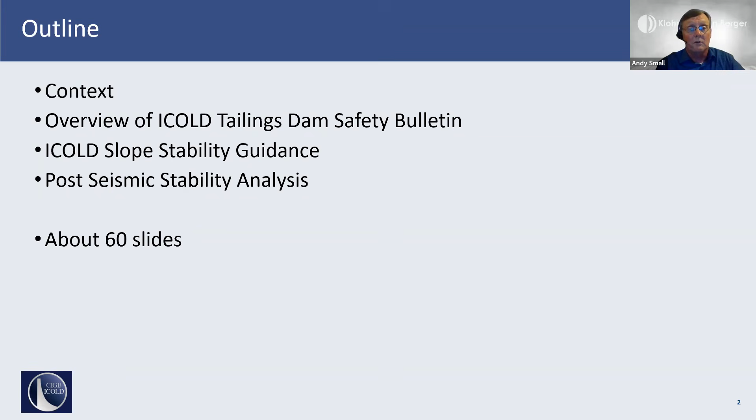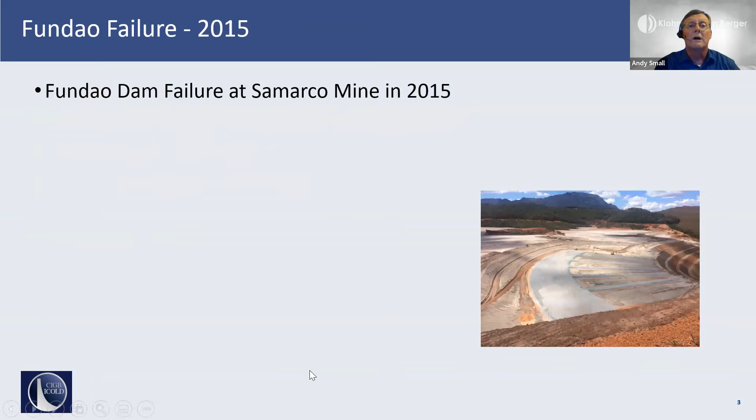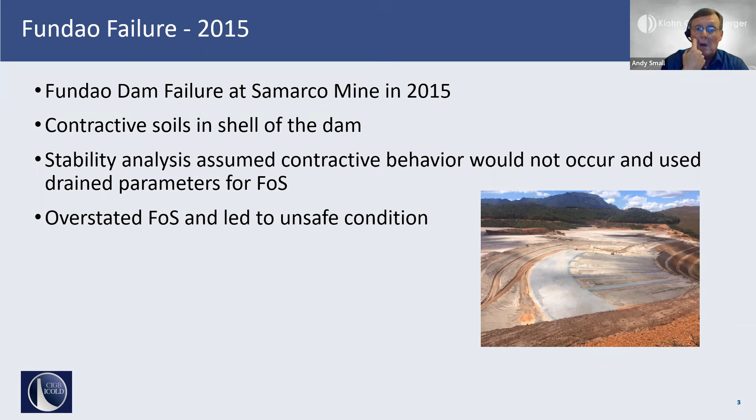So we go back to 2015, and many of you will remember the Fundao failure at the Samarco mine. There were contractive soils in the shell of that dam. The stability analyses that were conducted prior to that, as part of their ongoing stability certificates, had made an assumption that contractive behavior would not occur, and they used drained parameters for factor of safety. And when I asked the consultant of the day why, he said, because that's what the regulation said to do.

So as we're well aware, it overstated the factor of safety and led to an unsafe condition. From the panel report that was prepared, there was a number of cross sections cut. I'm just going to show you some of the stability modeling that was done. This is a typical example at the right abutment, where they used drained parameters. They used cohesion and phi, and it's always interesting to see how tailings can have a cohesion, but that's what they did because they had a bunch of triaxial tests and they drew a straight line to the data and they came up with a cohesion, but that's fine. That's not the challenge we're dealing with here today. And they calculated a factor of safety 1.9.

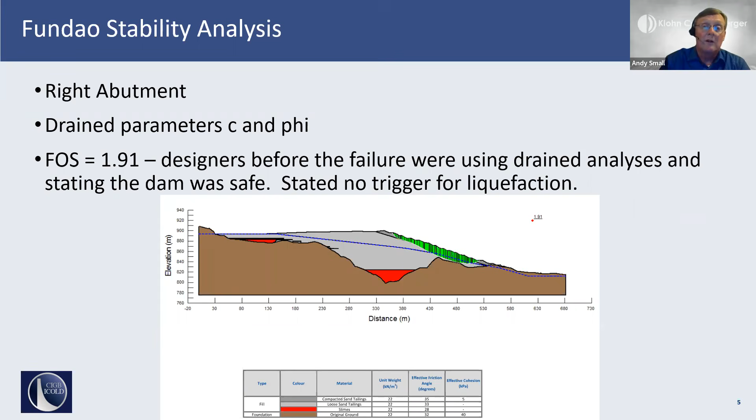They also felt they were in a low seismic area. They knew they had some contractive zones in the dam, but they decided that they didn't need to consider liquefaction because there wasn't a trigger. So they were in a low seismic area, yet they were raising the dam 9 meters a year. Now, if that wasn't a trigger, I don't know what would be. Now, the panel report concluded a very complex chain of events occurred, whereby there was slimes within the shell that led to horizontal deformations, that led to changes of stress state, and that ultimately became the trigger. But had they considered the undrained conditions properly from the beginning and didn't really care about the trigger, they wouldn't have run into this trouble. So the fact there was a trigger almost becomes irrelevant when you had those contractive zones within the dam.

If they had run the analysis back then using even peak undrained shear strengths, they would have found an undrained factor of safety of 1. And that was based on cone penetration test data they had that clearly showed it was contractive.

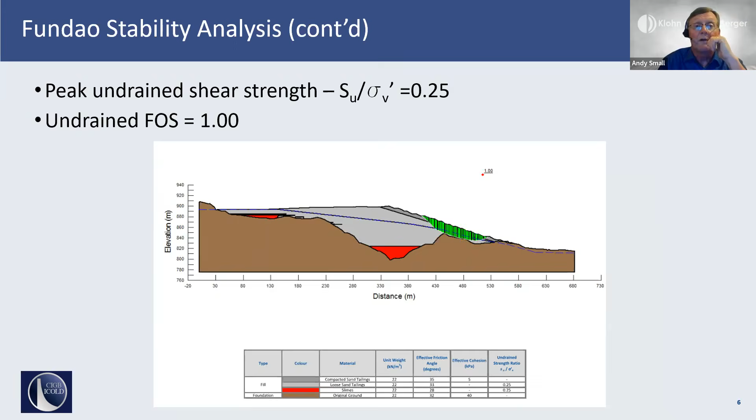The factor of safety of 1 should have been a flag at the time. But Brazil hasn't been used to running post-liquefaction stability analysis. Had they done that, they would have taken the cone penetration test data, interpreted an SU over sigma v prime of 0.07.

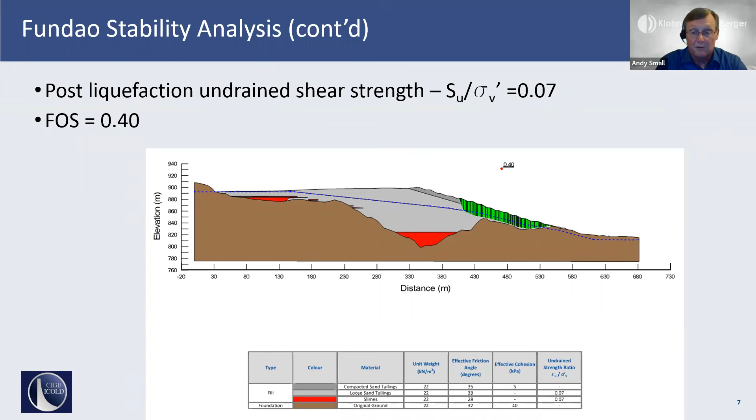and calculated a factor of safety of 0.4. Again, doesn't matter about the trigger. The reality is this is a very large dam. They had the conditions for liquefaction to be triggered. Had they known that this was the type of factor of safety they were dealing with, maybe then they could have done things to arrest the situation by putting in rockfill buttresses or doing something differently, but they just didn't even know.

Brumadinho was similar. The thing that made Brumadinho a little different was the bonding between the tailings particles that created a false strength. And so the owners and the consultant thought they had a very strong tailings and they could build it very high and very steep. But then when the failure started, the bonds broke, and that's what led to the rapidity of that failure happening in under 20 seconds.

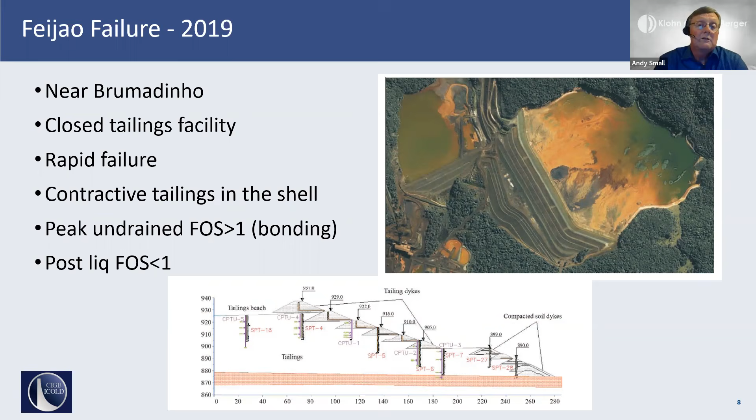But again, they had testing that showed the tailings were contractive. Some of you may have seen that master's thesis that was issued where this figure came from that showed they were contractive, but they didn't understand what they were dealing with. Had they run a post-liquefaction factor of safety, they would have found it less than 1, and they would have been at the stage of understanding they had a potential problem, but they didn't know that. They didn't know that that's what they should be doing.

So we have these two famous failures in Brazil, but the issue is not limited to Brazil. I practice in Canada, and I was seeing over time many other examples of this happening in Canada. In fact, I had one situation in Ontario where the consultant said they had a low classification dam, so therefore the seismic event was a 1-in-475-year event, and they didn't need to run liquefaction. Blow counts were 1s and 2s.

The CPT showed massive dynamic pore pressures and 1 megapascal tip resistances. They had slope angles of 1.5 horizontal to 1 vertical, and they had a head frame immediately downstream, such that if that dam were to fail, it would have flowed into the head frame. So no, this isn't just a Brazilian issue. We're seeing it around the world. I ran into a very important one in India last year.

So in 2016, I created a working group within CDA, and it was just trying to re-educate people about the fundamentals of undrained behavior, building on the work done by Carrier at MIT in the early 1980s, stuff that Scott's been doing. All kinds of people have been talking about this, but for some reason, the message had not been getting out. So I created a working group in 2016 with a view towards updating the CDA guidance and trying to provide improved guidance under CDA.

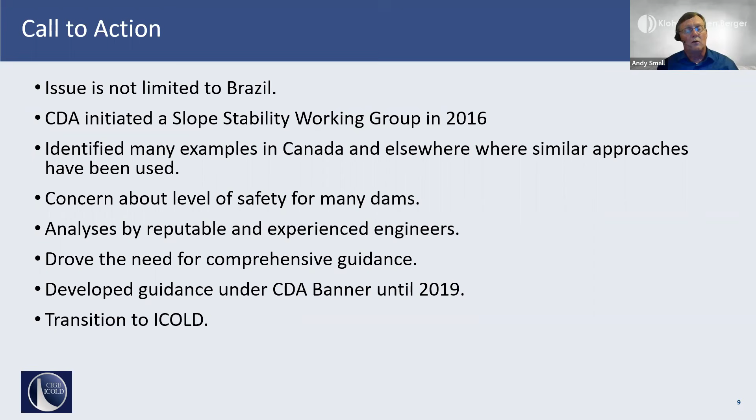And the thing we also did at ICOLD is we tried to provide some framework in terms of the what-ifs, the gray zones. So to help frame the slope stability analysis part of the bulletin, I'm just going to give you a brief overview of the bulletin itself.

Harvey McLeod with Klohn Crippen Berger, who was chair of the ICOLD Tailings Committee for 10 years, did the heavy lifting. He was a primary author on it, supported by a number of us that contributed to the bulletin.

As I said, it started in 2018 when we said we really needed a consistent approach for international tailings dam safety. This came from work that many of us are doing internationally as they were going through audits and reviews after the Fundão failure.

People are trying to understand, do their dams have similar characteristics to Fundão? And you would go to Kazakhstan and they would be following things in Soviet law, and they had a checklist on how to do dam safety, which had nothing to do with the reality we deal with.

And then you go into Africa where they had very, very little regulatory strength and no guidance. So we thought there was a lot of value in having international guidance.

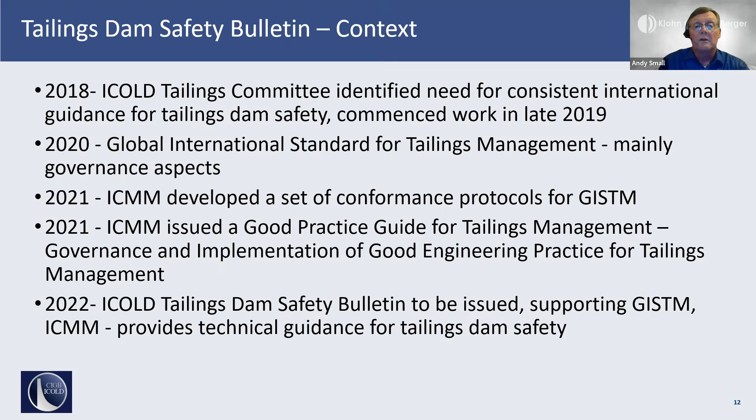That was before the GISTM came out, which was mainly governance aspects, although it does call out that you have to deal with brittle behavior. Then ICMM issued their guidance, their conformance protocols, or good practice guide. So what we did at ICOLD is we believe we've complemented the GISTM and ICMM efforts.

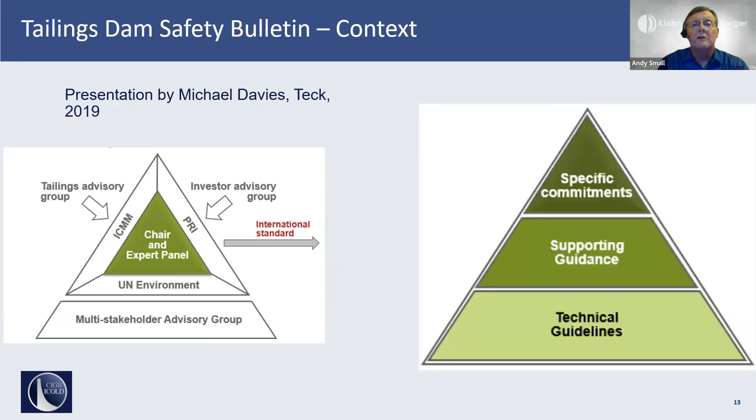In 2019, Mike Davies, as some of you know, had this nice graphic showing on the left-hand side the evolution of the GISTM, and on the right, the GISTM identifying the specific commitments that were being made.

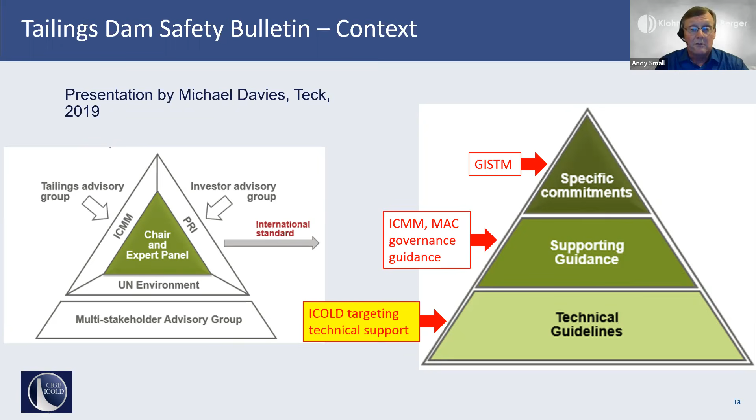Then the supporting guidance is being housed under ICMM and MAC, which is governance guidance. And then ICOLD is providing the technical support. So we've been very careful about not interfering or intruding into ICMM's domain. We're really focusing on the technical issues.

So in that regard, we have a long bulletin, about 180 pages long, supplemented by two appendices, and it covers a lot of things. What you'll see at the start is section 3 is closure. You might think, well, typically you'll see closure at the end of a bulletin like this, but we put it first and foremost to continue to reinforce the importance of designing for closure.

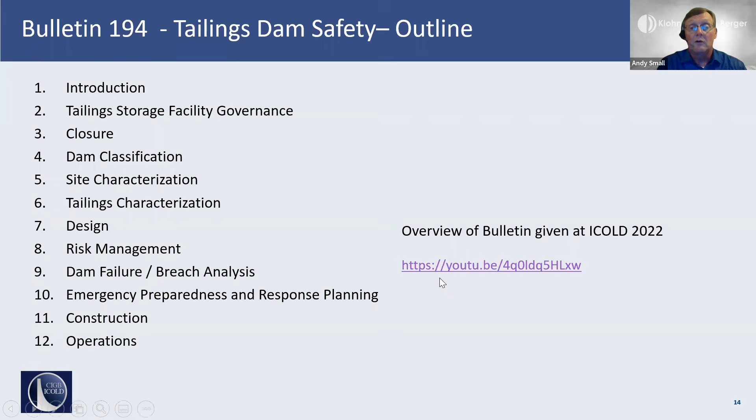If you're interested in an overview of the bulletin, we did one on YouTube. We have a YouTube channel we've created at ICOLD Tailings Committee, and you can go to that channel, and it's about a 3 or 4 hour video that goes through all of those chapters.

And here's really the crux of the matter related to our discussion this evening: appendices A and B, where we thought there was a lot of value in trying to provide information to the practitioner on shear strength deformation behavior of soils and tailings, and then how we take that information and create a framework for dealing with contractive soils in what I will refer to as the gray zone.

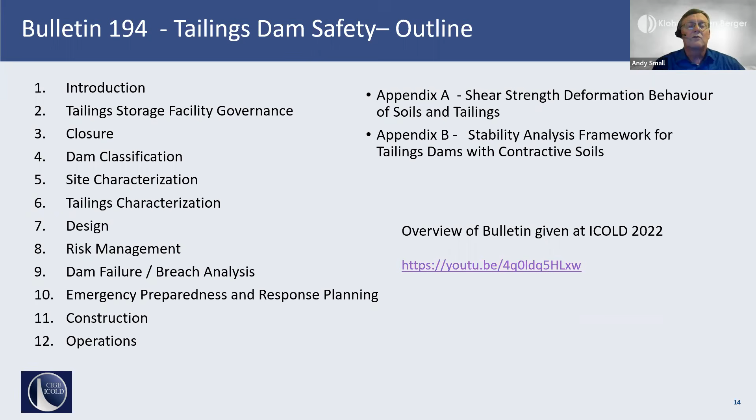So section 7 is on design, and I'm showing you this just to give you an understanding of the elements within the design chapter. You'll see it's rather comprehensive, and the slope stability assessment is section 7.9 of section 7.

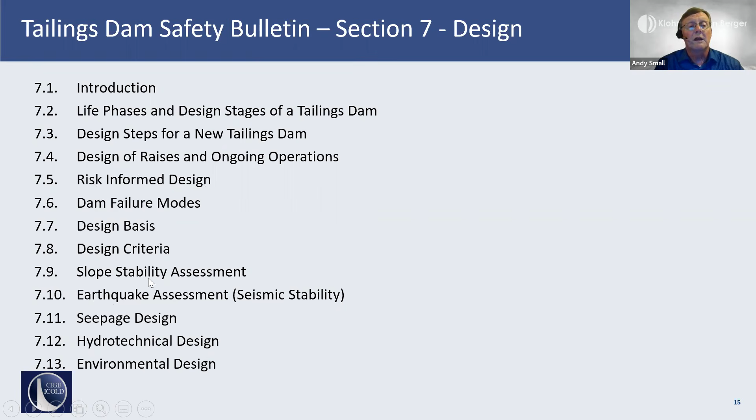And before that, you'll see things such as risk-informed design. Under risk-informed design, we talk about performance-based risk-informed design. We talk about the observational method and how it should and should not be used. And that kind of frames some of the discussion we have later on in slope stability assessment.

So getting into the actual slope stability guidance now. Section 7.9 is entitled slope stability assessment, not slope stability analyses. And that's intentional, because when you're assessing the stability of a slope, a limit equilibrium analysis, which we'll be focusing on today, is one approach for assessing that stability, but it's not the only one, of course.

Nonlinear deformation analyses are also a valuable tool. And if you follow along what Morgenstern was saying about performance-based informed risk designs, that's another piece of the whole stability evaluation.

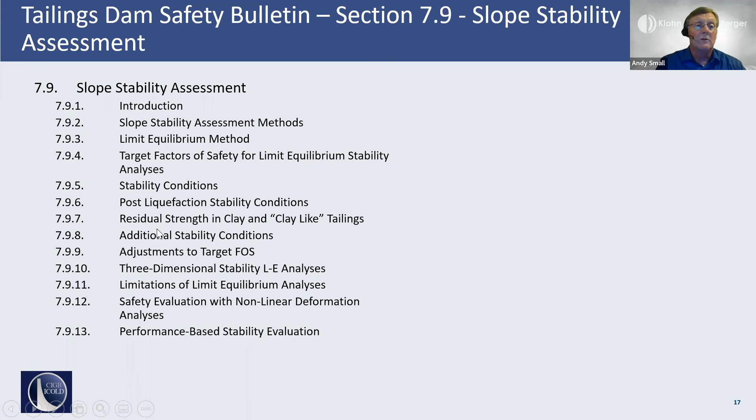So limit equilibrium, which we're going to be focusing on at this session, is really just one piece in your overall stability assessment. Another thing I wish to point out is that some of you may be familiar with the practice in Europe that uses limit states design, and we chose not to embrace that within the bulletin. We really believe that the approach we've described, which is pretty classic in North America, makes a lot of sense internationally.

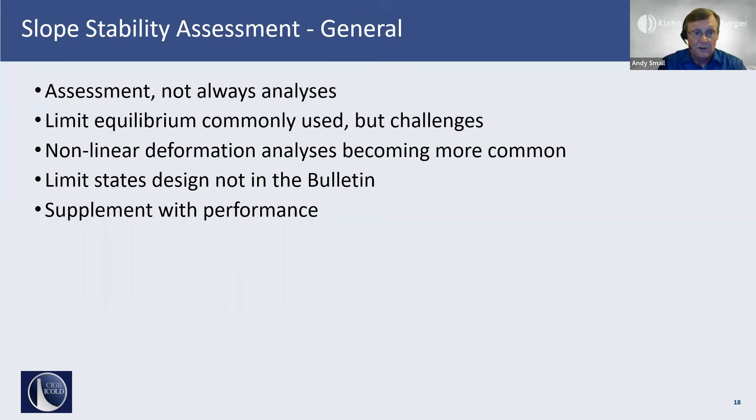So for those of you that are just learning about slope stability assessment, this is a typical cross-section where you have a dam. In this case, there's a starter embankment constructed upstream with this outer shell. There's a zonation and geometry that you identify, material properties are identified, boundary conditions such as the phreatic surface are noted, and design loads such as the height of the dam. All of those are fed into the stability analysis, where slip surfaces are considered and the factor of safety on the slip surface is calculated.

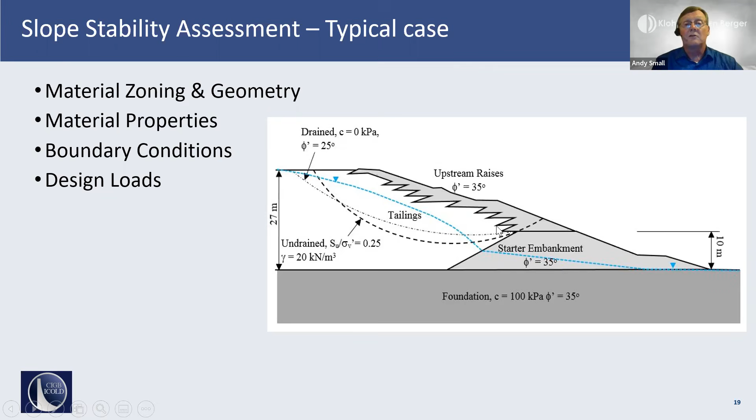When we're looking at a slope stability assessment, we need to consider a number of factors. Consequences of failure are quite important. If you have a very high consequence dam, you may wish to adopt higher targets of factor of safety than what we're going to talk about here in a moment. Again, if it's a very complex dam with a lot of uncertainty and variability, that could have a real influence on how you deal with the slope stability assessment. We're going to spend time talking about contractive-dilative issues, comprehensiveness of site investigations, geotechnical monitoring and instrumentation.

This strain incompatibility issue is very interesting because limit equilibrium does not deal with strain incompatibility. In the observational method, if you have a very robust investigation program with significant instrumentation, and you're using the observational method the way it was intended—that is, you're not just monitoring for the sake of monitoring, you're monitoring with a contingency plan available—then you could actually get away with a lower factor of safety.

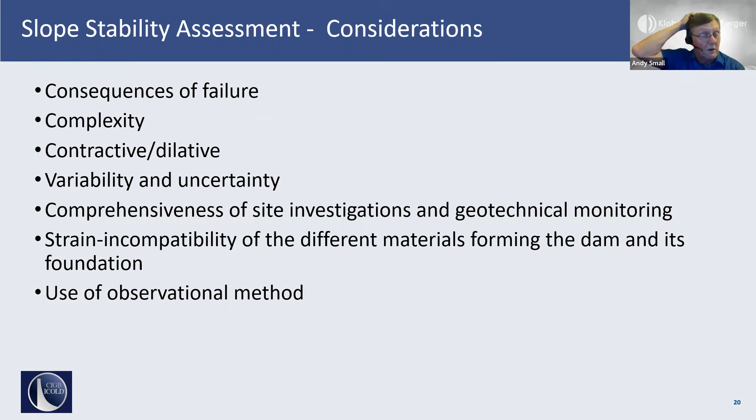What I'm showing you here is Mount Polley, and this is a very interesting example of strain incompatibility. This is a section through the dam that failed in 2014, where a stability model was run, calculating a factor of safety of 1.27. This was done by Klohn Crippen as part of a very detailed report that examined the failure of Mount Polley.

At Mount Polley, what happened is a foundation clay, a glacial lacustrine unit, was thought to be over-consolidated based on early investigations, but became normally consolidated as the dam was raised. So it passed the pre-consolidation stress of the materials and became normally consolidated. Then with continued raising, it went undrained and the whole dam failed. Using peak undrained strengths in the clay and the strengths of these materials, a factor of safety of 1.3 was calculated—this is what was happening when the dam was designed.

The designer of the day said, I have a factor of safety of 1.3, but they were actually calculating it based on over-consolidated strengths at the time, and they were happy because back in 2014, there was an interpretation of the slope stability guidance that said a 1.3 factor of safety was acceptable for end of construction. They said, we're still in construction, so all is happy. What they didn't understand was how the clay could change.

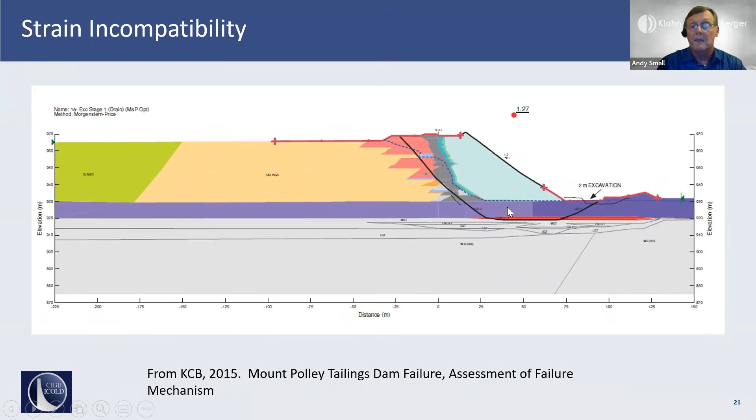So as a result, when you're in a limit equilibrium model and you put in the peak strengths of the materials, you're inherently assuming that the slip surface will move at the same shear strain along its length, and it'll achieve the same peak strength at the same shear strains. Well, limit equilibrium analysis can't represent that. It can't account for the fact that by the time this has failed, this is reaching a peak. It can't do that.

Some of you may have seen Morgenstern's lecture in Hong Kong a few years ago, for the 25th anniversary of the slope stability analyses. He was really criticizing limit equilibrium analyses at that time, and rightfully so, because a lot of them were being done improperly, really advocating for non-linear deformation analysis. He reviewed an early version of the slope stability guidance I was working on for CDA and said, Andy, what you're doing is fine for new dams and fine for many dams as screening tools, but because of this central issue, limit equilibrium is going to be a problem, because at the time they were just wrapping up this thesis.

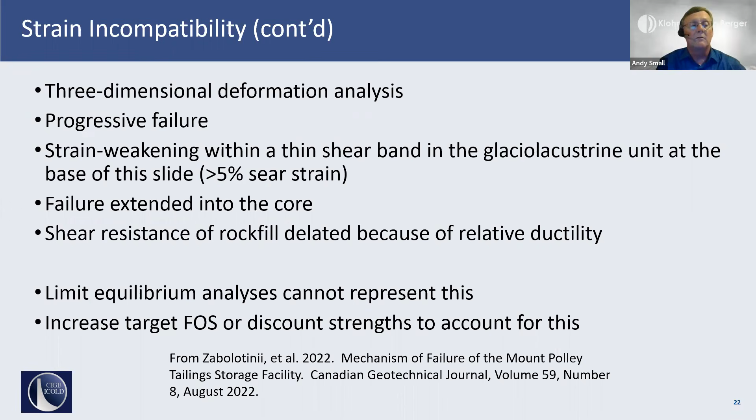So how do you handle that with limit equilibrium? If you have this type of geometry, which is obviously very different in terms of stress-strain parameters, maybe you handle it through increasing the target factor of safety. In my practice, what I do is I discount the strengths. So you still can handle it with limit equilibrium, but you've got to go in with eyes wide open.

Coming to the target factor of safeties, we've only specified two targets in the bulletin: static conditions, minimum target of 1.5, post-liquefaction 1.1. These targets are based on the understanding that you will be following leading international practice for site characterization and parameter selection. So if you're not doing that, if you're drilling 2 boreholes instead of 20, and you're really not following international practice, and you don't understand the foundations properly, then 1.5 doesn't make sense.

The thing about these guidance documents is that people look at the tables and say that's what it is, and they cast it in stone. You will find many words in our document that say, no, don't cast these in stone. Consider them targets and use engineering judgment to establish what is appropriate for your project.

There's also been discussions about what's the factor of safety for closure or for operating, or do I need to do things differently for planned dams. That may be, okay? You may have to make modifications to the targets.

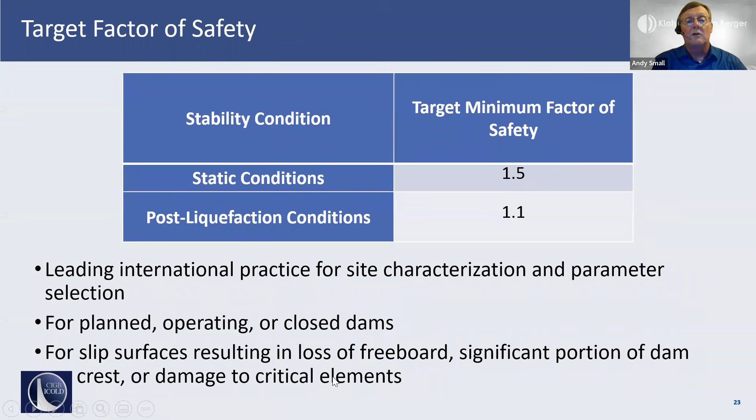And then the other thing is slip surfaces. What about these shallow slip surfaces that often people represent as critical, and that becomes the one they report in their slope stability reports? We're saying no, these targets should apply to slip surfaces that result in loss of freeboard, significant portion of the dam crest, or damage to critical elements. I have an example coming up in a couple of slides.

In many guidance documents, you will see target factors of safety provided for end of construction, rapid drawdown, or seismic and post-seismic loading. We do not provide those. Part of the reason is many people were taking a 1.3 end of construction target and building starter dams that were 20 meters high, putting tailings behind it, and saying I can still handle 1.3 as end of construction because I'm in the middle of construction. Well, if you look at the consequences of failure of that dam, they could be pretty severe.

That whole end of construction target of 1.3 that we saw coming from our hydropower friends was when they're building a dam that's not impounding water. If the dam were to fail, the consequences were a bit of a mess - they had to clean up and rebuild, but it wasn't a catastrophic failure. So we're very clear that if you're at end of construction on a tailings dam, you need to look at the consequences of failure, the performance you've been experiencing, and establish what you think is appropriate.

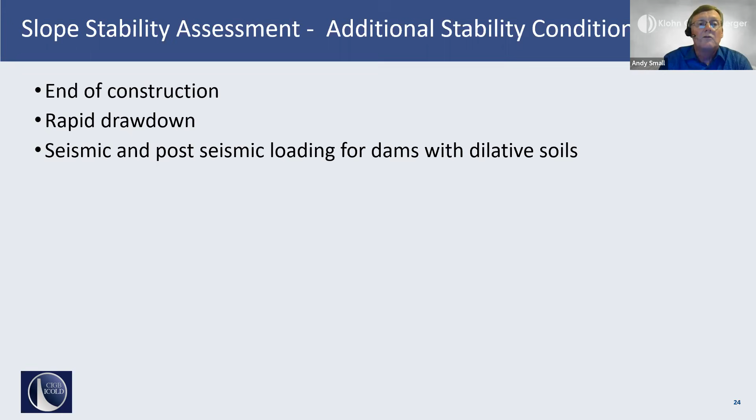Rapid drawdown for tailings dams - many of them have beaches, so that becomes irrelevant. Many tailings facilities don't really have a rapid drawdown mechanism. Some may have decant towers, which can drain the water out quickly, but in today's day many of them don't have that. And when we're dealing with seismic and post-seismic loading for dams with dilative soils, we actually don't prescribe factors of safety for that - we drive the user to deformation modeling.

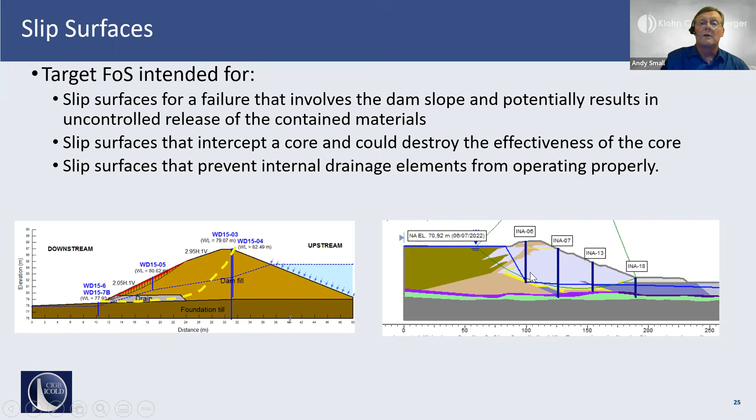So when I was referring earlier to slip surfaces that mean something, this is what I'm trying to show here. This is an example of a slip surface that we would want to see represented in a slope stability analysis that adheres to a target of 1.5. As I said earlier, many reports we see have this type of shallow slip surface being reported as a critical slip surface, and we've got to stop doing that. Over here, we have a slip surface passing through a dam that has a thin core and drainage elements. In this case, that could be a problem if there were deformations or movements along it that could affect those internal elements.

Now, the rate of failure is an important underpinning of this guidance. For saturated soils, we deal with drained and undrained failures. Many of you will understand these terms, but some of you may not, so I'm going to go through this slowly because it's a fundamental part of the guidance.

In drained failure, the rate of failure is slow enough that excess pore pressures generated during shearing dissipate, so the failure occurs in a drained manner. In an undrained failure, the rate of failure is faster than the ability of excess pore pressures to dissipate. Note these terms: rate of failure, not rate of loading.

When you're building a dam on a normally consolidated clay, putting 3 or 5 meters of fill on top of it, that's a rate of loading. You'll get a pore pressure response, undrained, as a result of that, and that's fine. But that's not what we're talking about here. What we're talking about is when the dam decides to fail, whatever the trigger may be, whatever failure is starting to develop - is the rate of failure going to be drained or undrained, not the rate of loading.

You can actually load some materials like a silt in a manner on a construction project - and what I'm dealing with right now, we have all kinds of piezometers in the silt layer, but the rate of loading has not been high enough to trigger undrained loading in that silt. But with blow counts of 5s and 6s, we're worried that when it starts to fail, it could be an undrained rate of failure.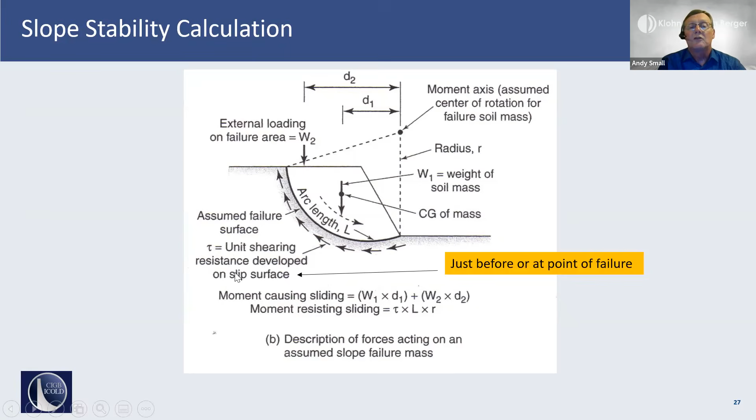So when we're looking at the factor of safety calculation, which is really a calculation of the maximum shear strength that can be generated from the soil strength divided by the shear strength required for equilibrium, then we're talking about this maximum soil strength just at or before the point of failure.

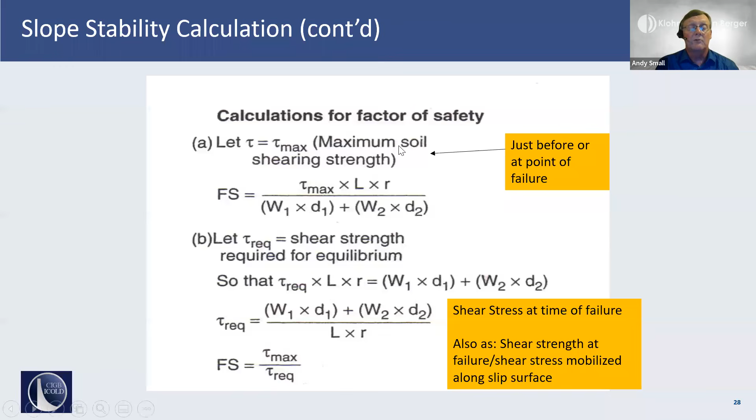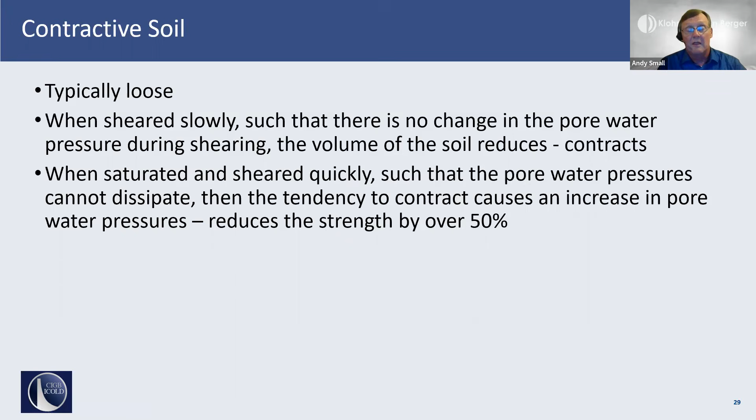And that's where this undrained bit comes in on contractive soils. So again, to reinforce the point, contractive soils, when saturated and sheared quickly such that the pore water pressures cannot dissipate, the tendency to contract causes an increase in pore water pressures, reducing the strength by over 50%. I have this little graphic to illustrate it further because as often as I use these words and take them for granted, I find this image tends to help.

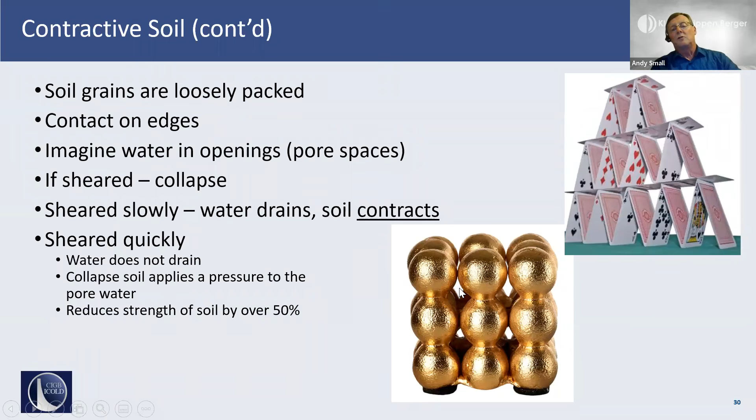Picture the soil grains at edge-to-edge contact, waiting to collapse. If you sheared it slowly, the little balls here would fall into the cavities between them, or the house of cards would collapse. If I was doing it slowly, with water in the pores, the water would drain out among the balls. If I sheared it quickly, as the balls tried to compress, the water would take the load, and that's what drives the strength down.

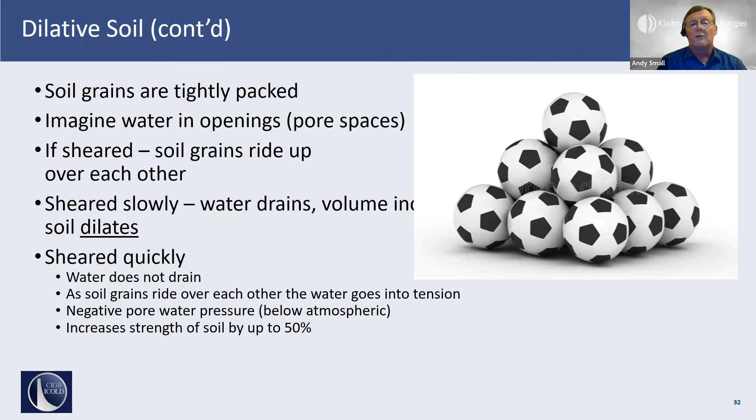If I look at a dilative soil, picture this stack of soccer balls - same idea. When the shearing happens on the soccer balls, what's going to happen? The balls are going to ride up over top of each other. There's a tendency to dilate if done slowly in a drained manner. If done in an undrained manner, as those balls try to pull apart to slide over one another, they will actually take the water into tension, which drives the pore pressures down below atmospheric and increases the strength.

So again, the rate of failure governs the analyses. In the stability reports I write, I actually talk about that. I say, okay, I have a clay in the foundation. It's going to fail in an undrained manner. It's a contractive clay, and therefore using undrained parameters, because the dam is failing in an undrained manner. I have sands and gravels compacted above it. They may also fail in an undrained manner, but they may generate negative pore pressures. As a conservatism, I'm not going to count on that. I'm going to continue to assume that they're not generating pore pressures during shearing.

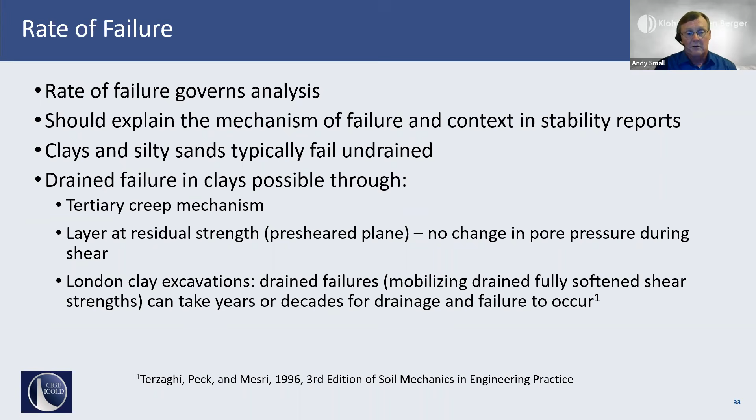So when we talk about failures, I might comment on who's ever seen a slow failure. Well, you could have a drained failure through some sort of tertiary creep mechanism. If you have a pre-sheared clay layer in a foundation, yes, that could happen in a drained manner, because by definition, residual strength is no change in volume, no change in pore pressure during shearing—that could be drained. Terzaghi pointed out that London clay excavations have actually experienced those slow failures in a drained manner for many years. So they do exist, but I believe they're an exception, and we really have to pay attention to the undrained failures.

So when we're looking at the slope stability assessment and undrained contractive things, we need to look at triggers—seismicity or static loading. We are asking you to consider the peak undrained strength when you get to a factor of safety of 1.5 and limit equilibrium. When dealing with clays that have not been pre-sheared, that have not gotten past their peaks, do you need to look at a large strain strength condition as well?

That actually relates to the post-liquefaction of tailings. It's a little similar. When we're talking about post-liquefaction of tailings or a granular material, we will target a factor of safety of 1.1 for that. We assume there's a significant strength loss beyond the peak undrained strength, but the same can happen in clays, and clays can lose a lot of strength. Now, the thing about a clay is it can take a lot more strain to lose that strength, and that's why we typically don't look at it. But if you're dealing with a clay that can lose significant strength over 5 or 10% shear strain, then you should be looking at the residual strength.

That is Mount Polley. That's what happened at Mount Polley. If they had done the stability analysis understanding how that clay could have gone past the peak, gone to a residual condition or a post-peak large strain condition, prior to the rock fill and the materials above it experiencing their peaks, then they would have been fine. So there are some cases where we do run a large strain post-peak strength against a 1.1. That's not necessarily tailings and liquefaction.

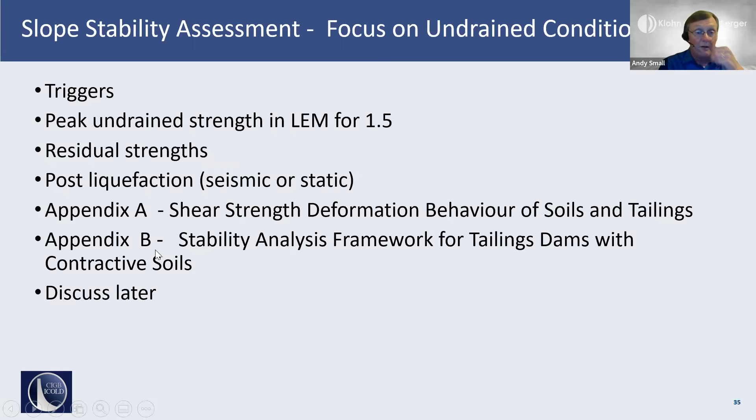So these appendices A and B provide a lot of details on the undrained behavior. I'm going to skip along here.

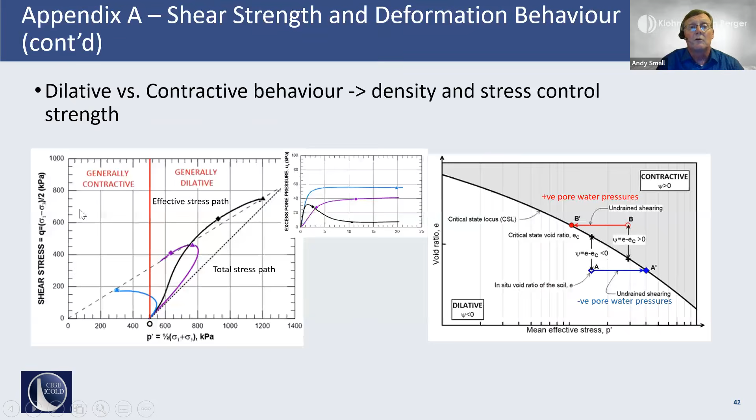In Appendix A, there's a number of fundamental concepts elaborated. I've touched on a bunch of these already, so I'm not going to spend time going through these slides with you. I'm going to get to this one here that's pretty important.

So Appendix B presents a logical framework for selection of analysis techniques and selection of appropriate factors of safety when you can't meet the minimum targets we've outlined. For existing facilities, it may be necessary to accommodate existing contractive and/or brittle materials and structural zones - that's like toe berms and so on, or dewatering, although I think toe berms make a lot of sense.

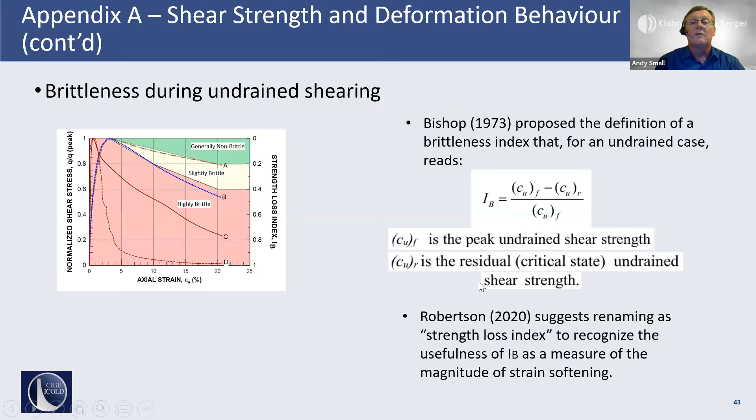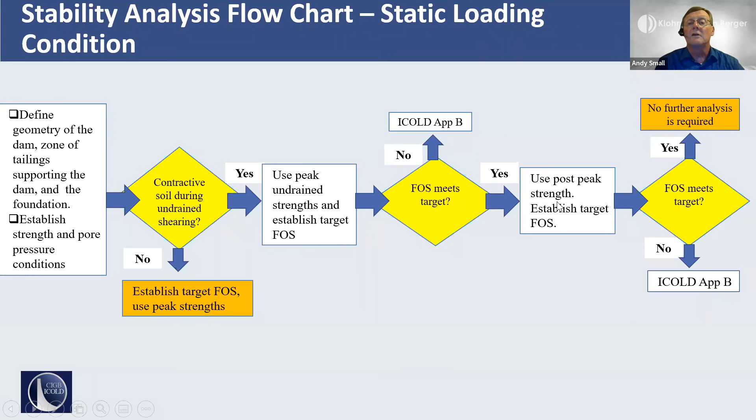It emphasizes the importance of the factor of safety calculated using post-liquefied shear strength over the static factor of safety. So if I go back here, the reality is what many of us do in the industry is we start over here. If we have a potentially liquefiable zone in the dam, we start here and work backwards. We don't start over here, we start here. Because if we can meet the target 1.1 factor of safety post-liquefaction here, then we're fine. But if we can't, then we have a bunch of work we have to do to try to sort it out.

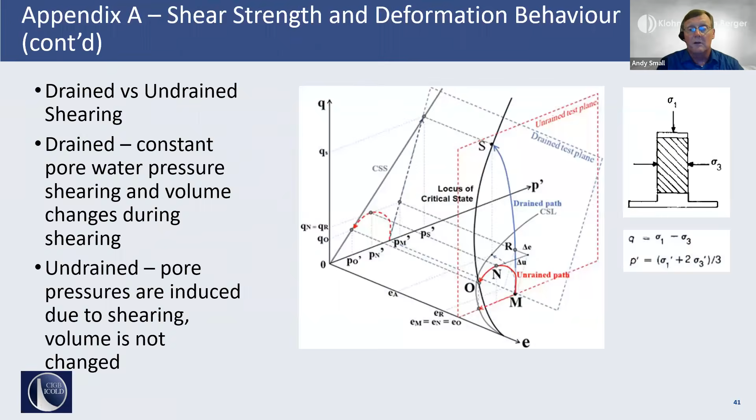So within Appendix B, we provide a framework that has different cases depending on the brittleness of the soils. I'm not going to get into that with you - the bulletin will be issued in October, and I encourage you to go look at it and understand the conditions and the different targets and factors of safety we suggest.

But it really boils down to how cases 1 and 2, that are not considered brittle, can support reducing the factor of safety using peak strengths to 1.3 rather than 1.5. The factor of safety should still be greater than 1.1, but the strength loss isn't that significant.

In my practice, I have situations where I'm not getting 1.1 here, I'm not brittle, so we're doing other things to try to develop a safety case that shows it, and it comes into triggering, it comes into what the true deformations may be, running a FLAC analysis to try to understand what truly could happen. Would the dam truly run away from you?

So just because you don't meet the targets doesn't mean you have to say the sky is falling. There's more work that can be done to build a safety case. But if you have brittle tailings like this, and particularly if there's life safety issues at stake, at 1.1, don't worry about the triggering - assume it triggers and just do it.

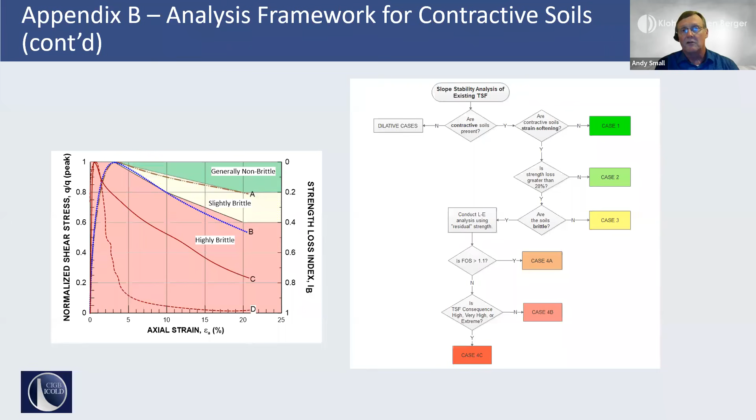The triggering analysis is done to inform the potential probability of the event occurring, which may inform your prioritization and timing for implementation of remedial measures, but it doesn't change the fact that you can't play a triggering game to defer or cancel the work.

So in part 4 here, this is the last part, seismic stability analysis. I really want us to be using the term post-seismic stability in a certain way. Post-seismic stability is often used interchangeably with post-liquefaction, and I really wish we would do it differently.

I wish we would use post-seismic stability for dams that are built of compacted fills over competent foundations, do not have liquefiable zones, no significant strain softening, and we use deformation analyses to advise us about the post-seismic stability.

You could run an analysis using Shake or similar tools to predict the pore pressures that could be generated during a seismic event within a dam. You could put those pore pressures into the dam and derive a factor of safety if you wanted to. But given how many of these dams are dilative, often the shaking can lead to negative pore pressures during the shear stresses developed in shaking.

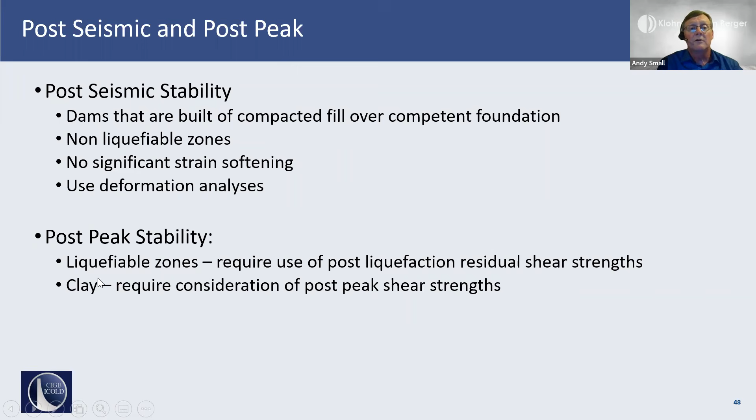So that factor of safety calculation can be kind of hokey. You can still do it, but at the end of the day, I wish we'd just use post-liquefaction, post-peak stability for liquefiable zones, and save the word post-seismic for conditions which are good. We've talked about liquefaction of granular materials and post-peak for clays.

Now, pseudostatic analysis is often done because regulators ask for it. In Brazil, I'm dealing with this in particular, where every single analysis is pseudostatic. They use something like a 1 in 2475 seismic event, calculate the pseudostatic factor, get better than 1.1, and say they're fine, without understanding what pseudostatic really means and what it's supposed to do and not do.

What really should be happening if you have dams without liquefiable elements is calculating deformations. If the calculated deformations using simplified methods aren't acceptable for the dam, then move forward with advanced deformation modeling.

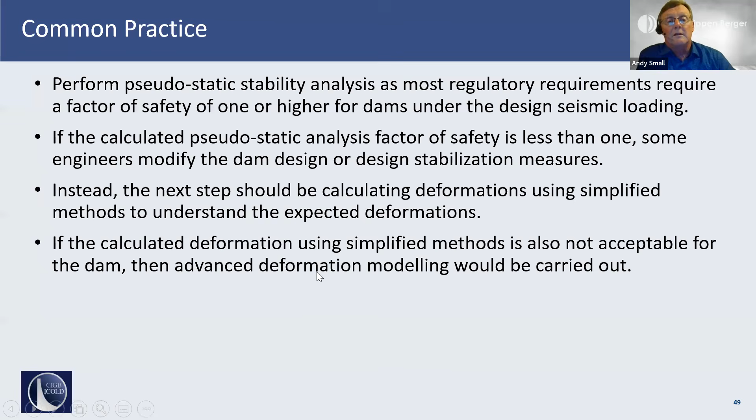I'm going to talk briefly about Hynes-Griffin and Franklin, the early days of pseudostatic. Terzaghi preceded this, but Hynes-Griffin and Franklin did a really good job looking at about 300 dams. They had a database of all the dams, looked at how they were affected by an earthquake and how much they deformed.

They determined that if you put a factor in your stability analysis, K, a seismic coefficient based on 0.5 times the peak ground acceleration, and calculated a factor of safety greater than 1.0, then the dams wouldn't move more than 1 meter.

This is a quote from Hynes-Griffin and Franklin: 'Applying this amplification factor, which gives an upper bound of 1 meter displacement for the rigid plastic sliding block, the ratio of critical acceleration to peak bedrock acceleration is 0.5.' There's the 0.5, and there's the 1 meter.

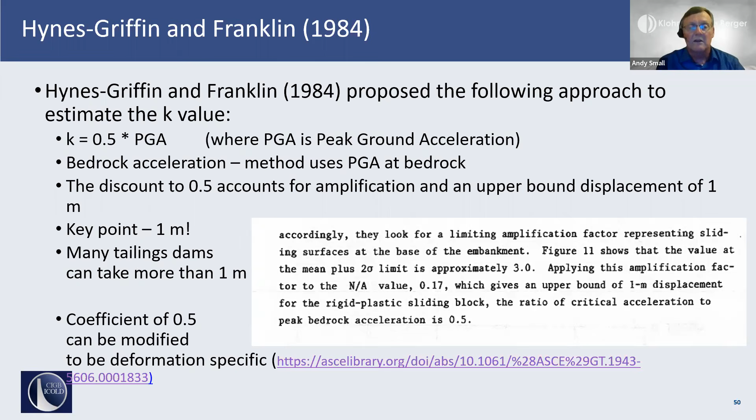That's all it was intended to do. But many people interpret pseudostatic as some magical number that tells you whether it will fail during an earthquake. That is not it. It's some kind of simplified surrogate deformation measure, which isn't very helpful.

Hynes-Griffin and Franklin clearly say you should not do pseudostatic if you have significant strength loss under the design seismic event. What I'm seeing in many cases is people have liquefiable soils and still run a pseudostatic analysis. It makes no sense.

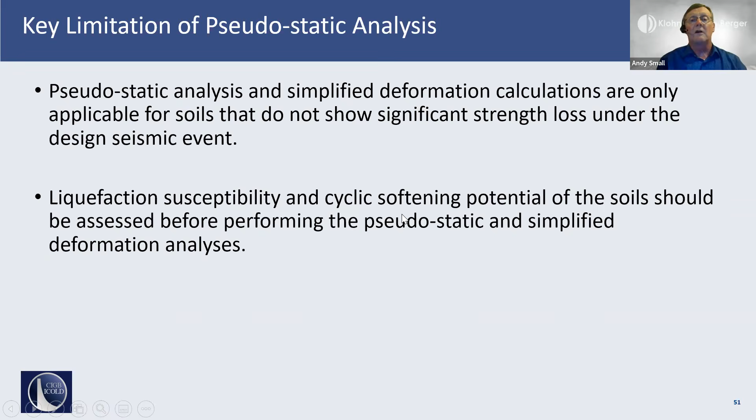To check the liquefaction potential, you either look at liquefaction susceptibility for granular material, or you look at cyclic softening of fine-grained materials. As a result of that understanding of whether you have liquefiable materials or not, we're trying to move away from pseudostatic analysis.

As I said, pseudostatic is misunderstood, misused, and of limited value. We're saying if you have to use it to satisfy some regulatory requirement, then please do so with caution, and do it right. There's lots of work out there that tells you how to do it properly.

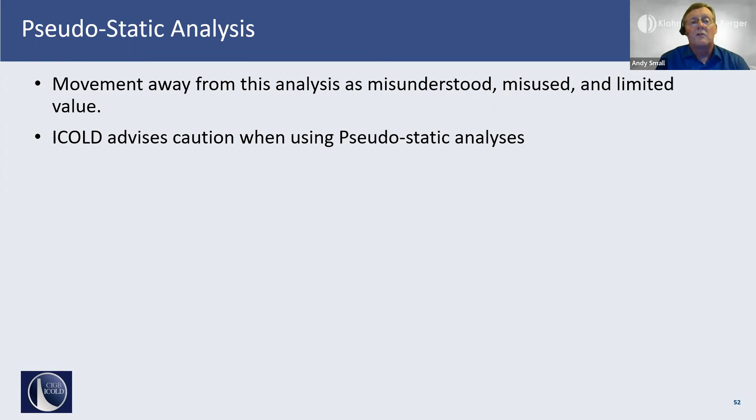At the end of the day, in my reports I still say, okay, Mr. or Mrs. Regulator, you asked for pseudostatic, I'm giving you pseudostatic. Now I'm going to explain why you don't need it, why there are better tools available, and we're going to give you a deformation analysis. If we as an industry could write more reports like that, maybe we'd get this thing shut down over time.

In terms of liquefaction, there's a number of different techniques available to determine whether your tailings are liquefiable. Youd's work based on Seed's work from 2001. Boulanger and Idriss is a very comprehensive approach - this is the Boulanger and Idriss title page here.

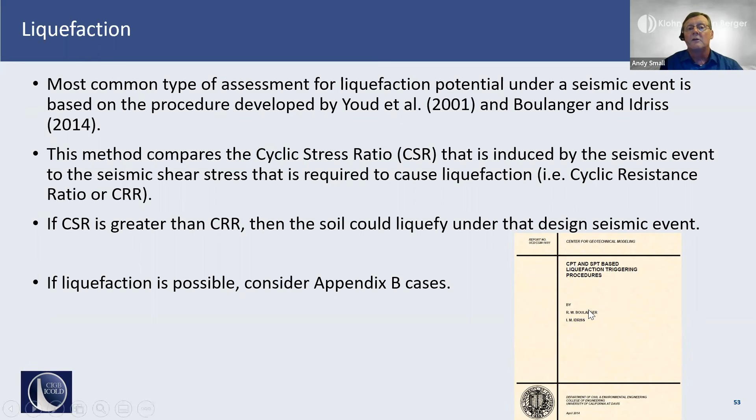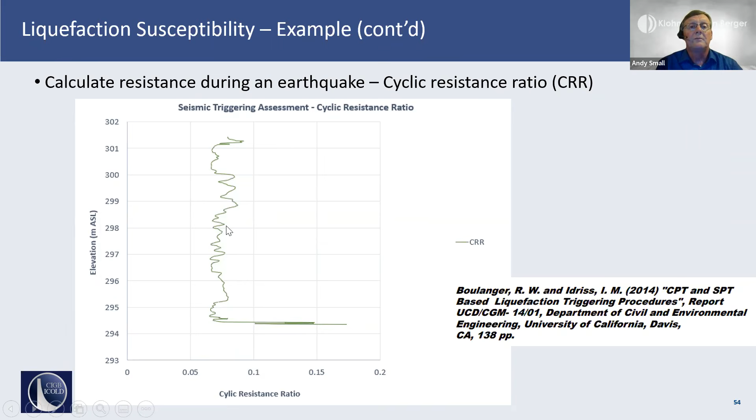I'm going to quickly go to a case study on a project where you take the SPT and CPT data and calculate what's referred to as a cyclic resistance ratio. Boulanger and Idriss describe how to do that. Then for different seismic events - in this case 2,500, 1,000, and 500-year return periods - this gives the cyclic stress ratio.

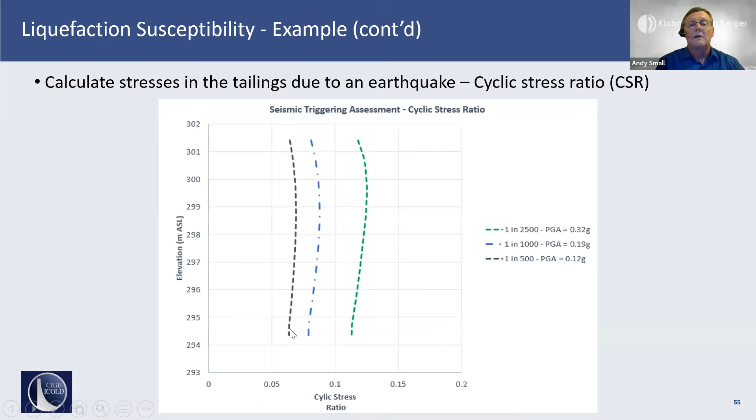So the 500-year event is here, the 1,000-year event is here, the 2,500-year event is here, and you can see how they compare. Here's a cyclic resistance ratio at about 0.07, somewhere in here. So you can just divide the two to get a factor of safety.

And that's what this shows. So when dividing the cyclic resistance ratio by the cyclic stress ratio, we can get a factor of safety against liquefaction. What this shows is a 500-year return period earthquake event might be okay, 1,000-year not so much, 2,500-year pretty bad. On this particular project, this informed our client that a 500-year event could happen next year, or 2 years from now.

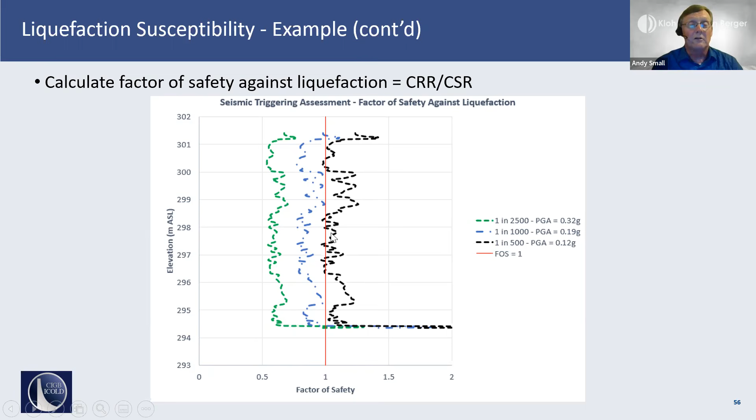A 500-year event has some sort of realistic probability in our lifetime, and so it informed the timing with which we're to implement remedial measures. The post-liquefaction factor of safety for their dam was 0.5. The peak undrained factor of safety for the dam was 1.4. So the post-liquefaction told us they had a problem - they needed to do something. This helped inform the prioritization and the implementation timing we're moving forward addressing.

But I come back to those dams that are good dams built on competent foundations. The methods by Bray and Travasarou - and I'm very pleased to have Jonathan on the line with us today - is the one that seems to be the most reliable. Swaisgood is good as the poor man's very quick deformation analysis. I do it when I only have 5 minutes and need to calculate a deformation. Very simply, if I have a 0.2G, 100-meter high dam and magnitude 6 earthquake, it'll tell me I have about 3 to 10 centimeters of movement. Now the Bray and Travasarou method is much better, and it might tell me I have 10 or 20 centimeters of movement, but it gives me a sense of what the movements are.

This becomes very important when you're talking to people about this whole pseudostatic issue, when they're saying I have a factor of safety of 1.2 or 1.3, therefore a settlement less than 1 meter. Well, how much less? Is it 5 centimeters, 10 centimeters, 90 centimeters? So these methods are far more powerful.

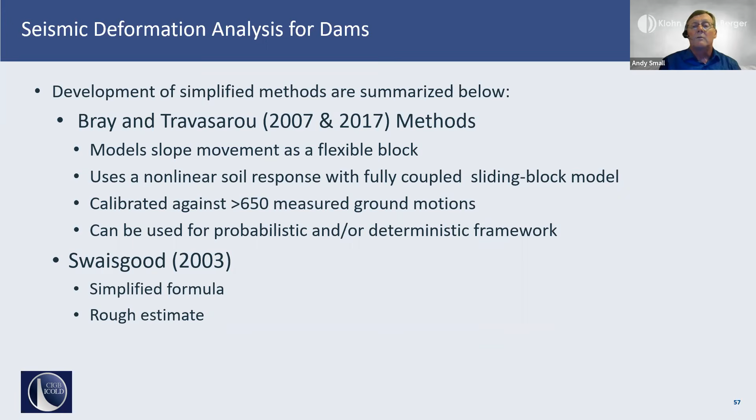So that concludes my presentation. Closing remarks: we believe the slope stability guidance can now be viewed as leading international practice. It's been reviewed by a lot of people - we had Andy Fourie, Peter Robertson, a fellow out of Spain, a fellow out of Brazil. I sent this presentation to Jorge, Scott, and Jonathan before, and they've been supportive and offered comments. So this isn't something unique - we believe this is consistent with leading international practice and should be embraced.

Obviously you have to comply with the local regulations first and foremost, but don't just comply with them. I give you an example here in Brazil - in regulation there's no post-liquefaction. Scott Olson and I are two people that have been trying to push back against that. In fact, in my deliberations here in Brazil, I'm trying to work with IBRAM, the Mining Association in Brazil, on how we can get the regulation to change. What we understand is that they're paying attention to the ICOLD guidance that's coming because they've seen earlier drafts, and they're starting to ease off on that.

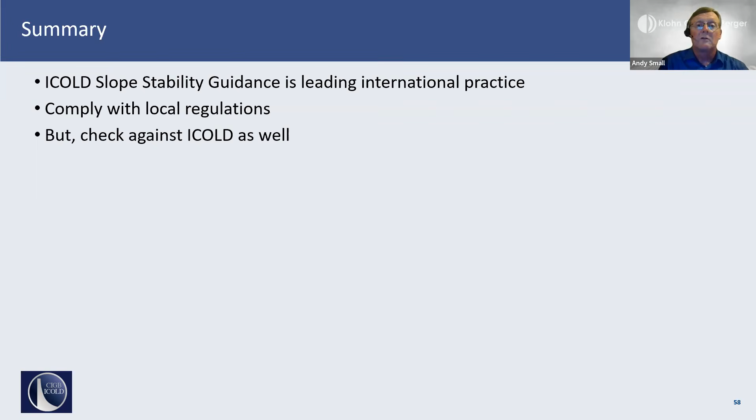That is a great summary of what ICOLD is doing. Andy, thank you very much for sharing that with us. We do have some time here at the end, so why don't we take advantage of that? We've got a number of questions already piled up for the panel session, so we might as well take advantage of the 10 minutes, 15 minutes that we have here and start addressing some of those.

So the first question that came in was: what about the potential for retrogressive failures that start with some of those initial shallow failures? How is that accounted for in stability analysis? Absolutely - the target factor of safety of 1.5 we prescribed does not account for progressive failure. You then have to take a look at the situation you have, and it goes into this large strain discussion we had, and develop a target to address that. It's simply accepting 1.5 for progressive failure is not a good idea.

And if I could, I'd like to add to that: if you have a material that is not strain-softening in your outer shell of a dam, and it's strain-hardening and more ductile, the amount of movement that has to occur for that to get back to a factor of safety above 1 is going to be relatively small.

So you're not changing the stresses behind that shallow slough very much, and it's unlikely to develop into a retrogressive failure. It's when that material strain softens and flows away, and now you've got an oversteepened slope behind that, where you have the issue with retrogressive failures primarily developing.